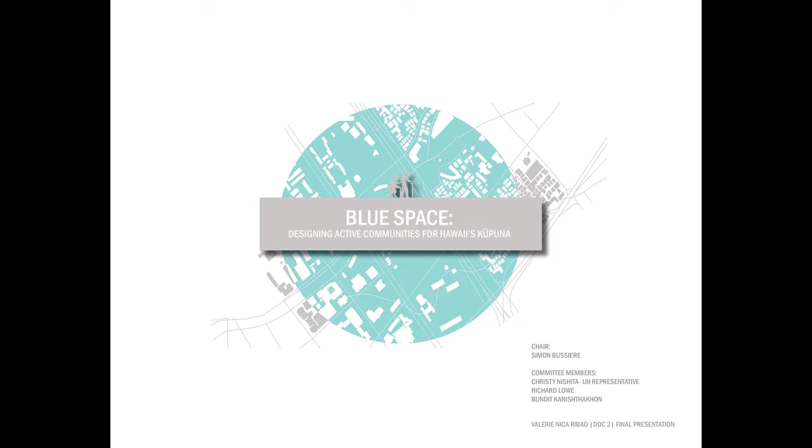I'm Valerie Ribao, and I'm presenting my doctoral thesis, titled Blue Space: Designing Active Communities for Hawaii's Kupuna. For those who may not know, Kupuna is translated in Hawaiian and refers to an older adult or grandparent. My thesis is divided into two parts: the first half discusses my research problem and what blue space is, and the second half is dedicated to my site approach, design principles, and how they are applied to my design.

My focus is taken back home here on Oahu, so I looked at the census tract of those 65 years and older. Many older adults are within the city side of the island, as marked in red on the map, compared to other parts. One factor is that many amenities are provided in the city of Honolulu, such as convenient hospitals, healthcare services, and proximity of kupuna homes.

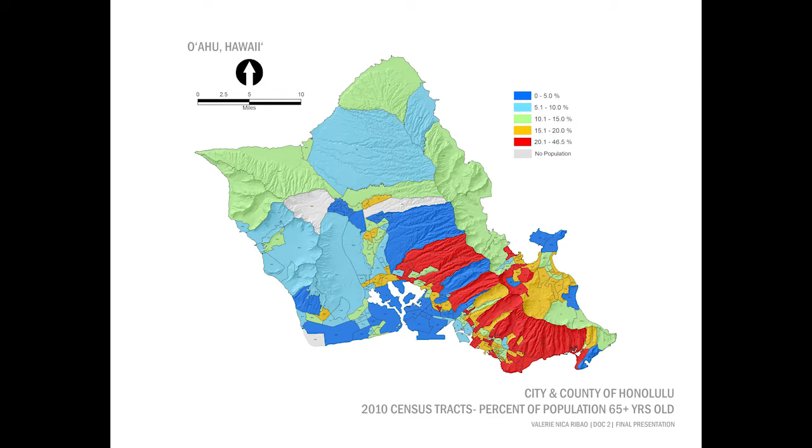As shown on the table, these percentages were projected from 2010 through 2040, and I wanted to compare the growth of Hawaii's older adults to the US as a whole, and how much higher it would still be in the next 10 to 30 years.

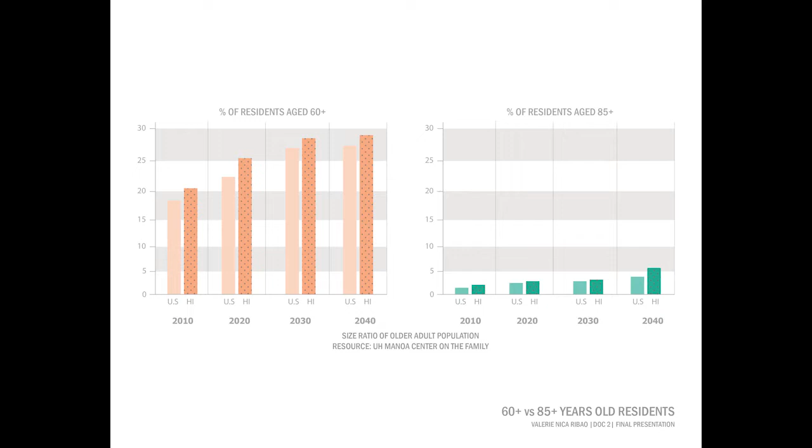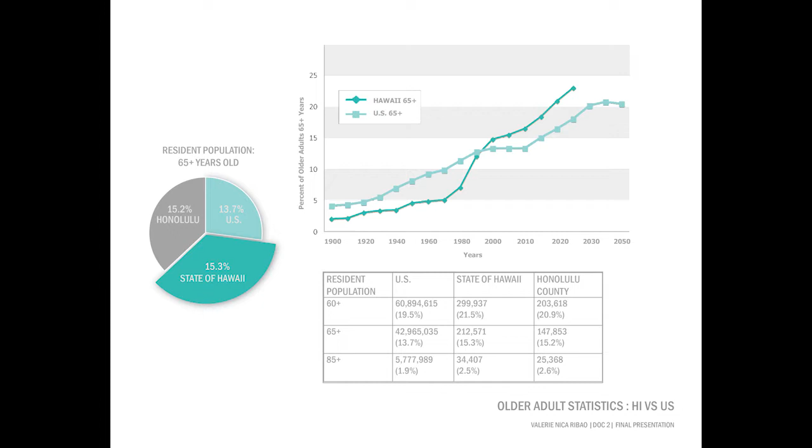Hawaii state residents aged 60 and over made up 21.5%, compared to the US. The same goes for kupuna who are 85 years and older. By looking at the graph and table, the number of older adults 65 and older is higher than the national average and will continue growing. These numbers matter to keep in mind, to consider how they will affect our built environment and how these individuals will navigate around the community.

The positive side is that through research, Hawaii has the highest life expectancy for ages 65 and older, at 17.3 years compared to the national rate of 12.9 years. Though among kupuna, they face difficulties in their everyday lives, specifically those with disabilities such as hearing, vision, or physical mobility. In fact, 87% of the older adult population have one or more chronic conditions, and about 38% reported poor physical and mental well-being.

Most kupuna stay at home, live in a more institutionalized care home, or use other healthcare services. Though spaces within the building, such as recreational spaces or outdoor areas, are limited. We have to note that each kupuna has different interests, though there are some activities they may not have the energy for.

The goal of this thesis is to break this gap between the kupuna and the community. To break that gap, an element that can help bridge these two together is the factor of water environments, or as I call it in this thesis, blue space. So what is blue space?

Blue space is a term referring to areas that harness natural bodies of water, such as watersheds, ponds, lakes, or oceans. It's used in environmental policy and management as nature-based design solutions, which are instruments inspired by nature to enhance ecosystem services and multiple health benefits. In this thesis, blue space focuses on developing infrastructure near blue space, such as waterfronts and walkways, making these areas age-friendly. Blue space is a similar concept to green space, which people refer to as grassy parks.

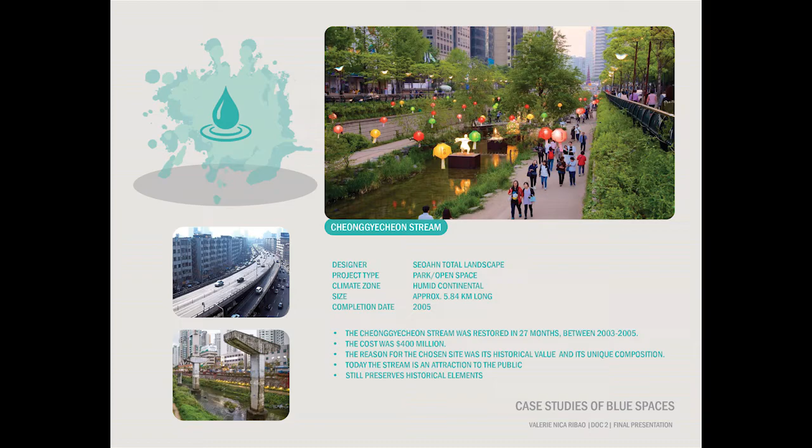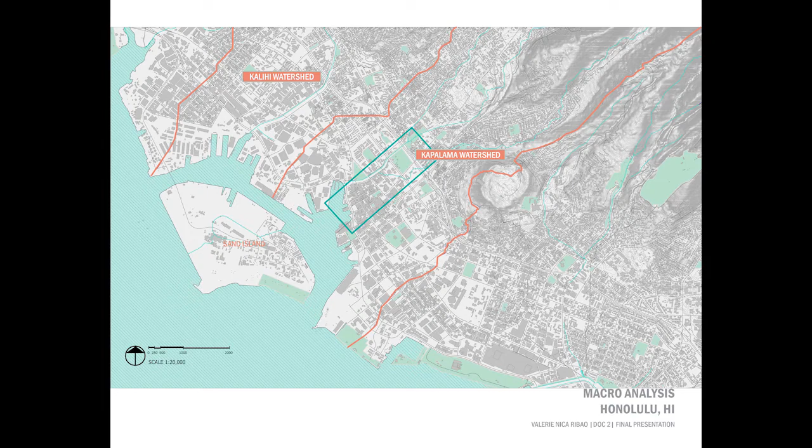Moving on to the design. Outlined in the teal box is my focus area. This map shows future conditions when sea level rise strikes the south shore of Hawaii at 6 feet, which may occur 50 years from now. I think this is important to consider when designing for the kupuna, to think about circulation.

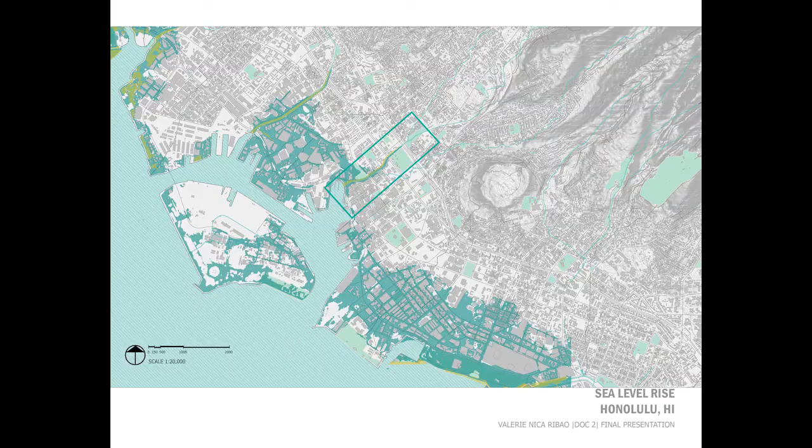One reason I chose this site is that, throughout the sites I observed, the Kapalama watershed had a significant amount of senior care services in proximity to the Nu'uanu stream.

Also, it is one of the locations with a high density of those who are 65 years and older. A zoom in of the site shows that there is a lack of ADA applied areas, such as no curb cuts, worn out tactile pavements and crosswalks, and multiple trip and fall hazards.

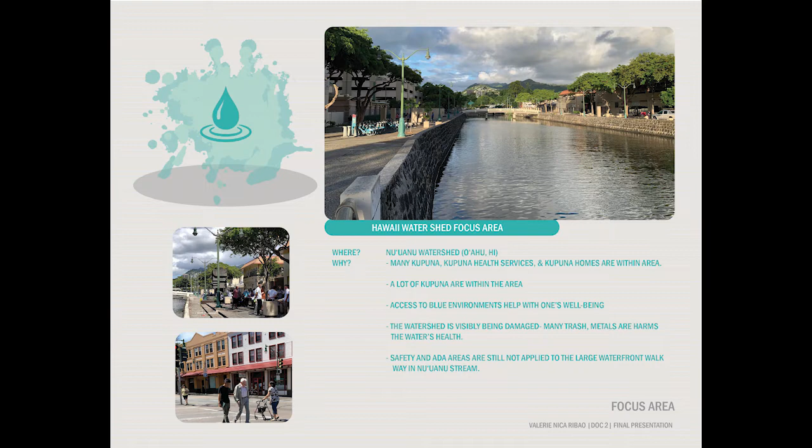As for the water, there was a lot of trash or metals randomly dumped into the stream, which damages the health of the stream. The positives of the site are the connection of the building and views of the water. Many kupuna, as I observe, love to gather near the water.

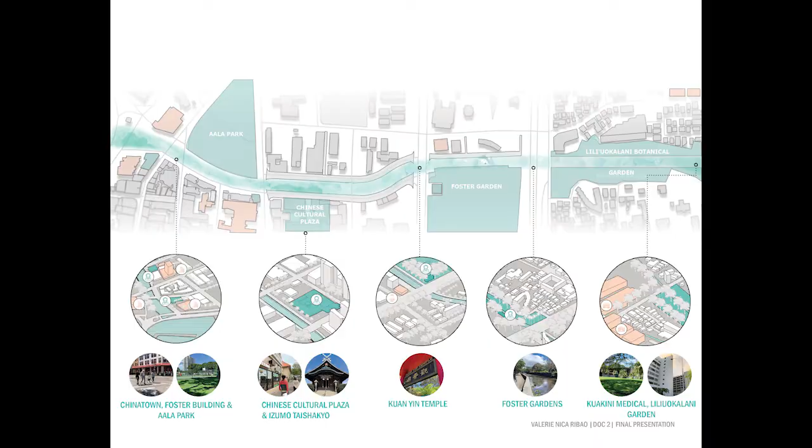Through the Nu'uanu stream, there are various landmarks which are key elements to enhance the design of these areas. This could be a good indicator for kupuna to easily orientate themselves. In this map, I've diagrammed the horizontal access, which shows moments where bridges are placed, restrictions that are not accessible to pedestrians, and in blue arrows, the nice views are represented.

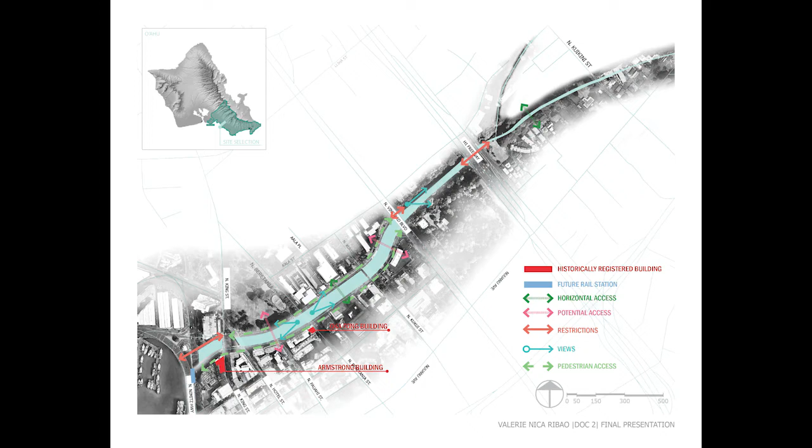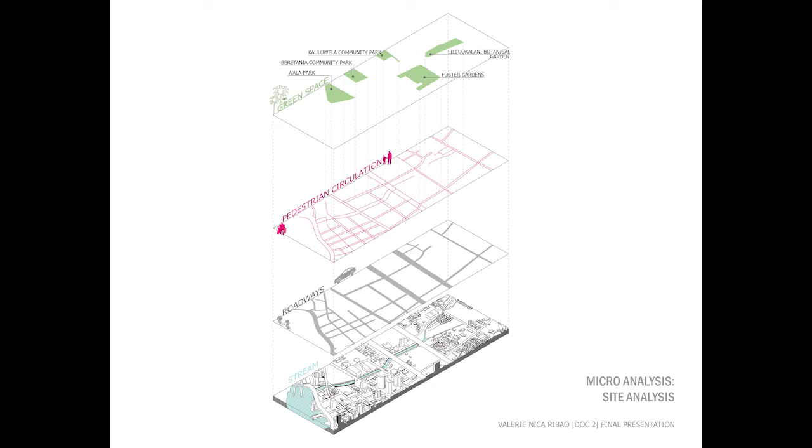This axonometric layers the available green space within the area, and it helped me visualize how the space is and how to direct people to the water.

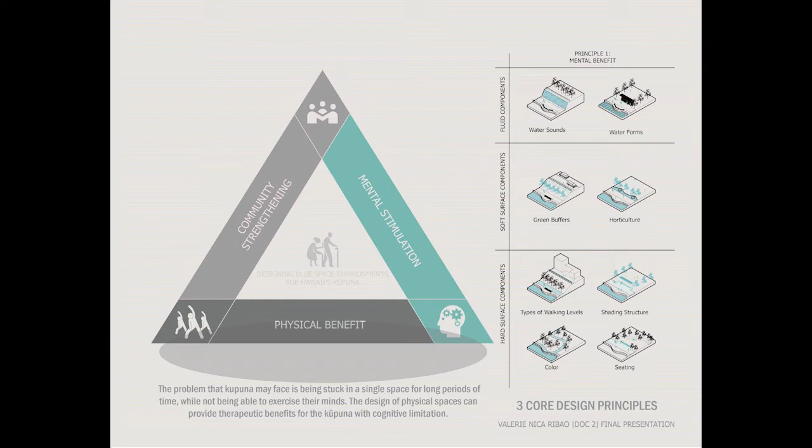Next, the design of physical spaces can encourage physical activities. These components are to help the kupuna with their mobility as they go out of their homes and enjoy leisure time in the outdoor environment.

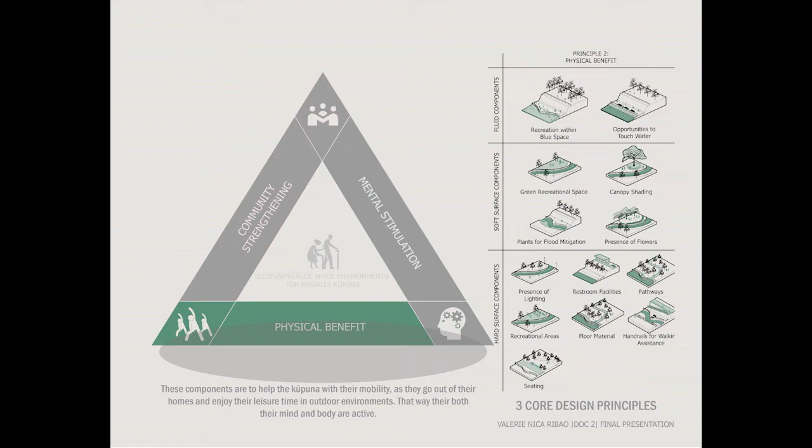The design of physical spaces can encourage community engagement, so that kupuna can comfortably enjoy their leisure time and not be deprived from cultural events going on around them. This principle combines both the benefits of the mental stimulation principle and physical benefit for the kupuna.

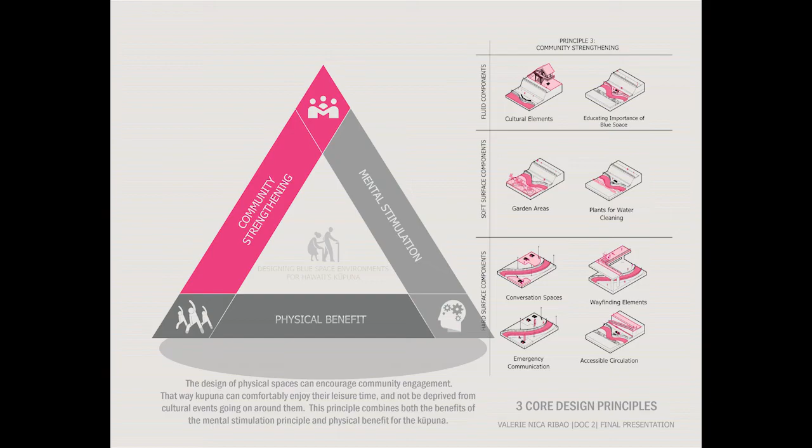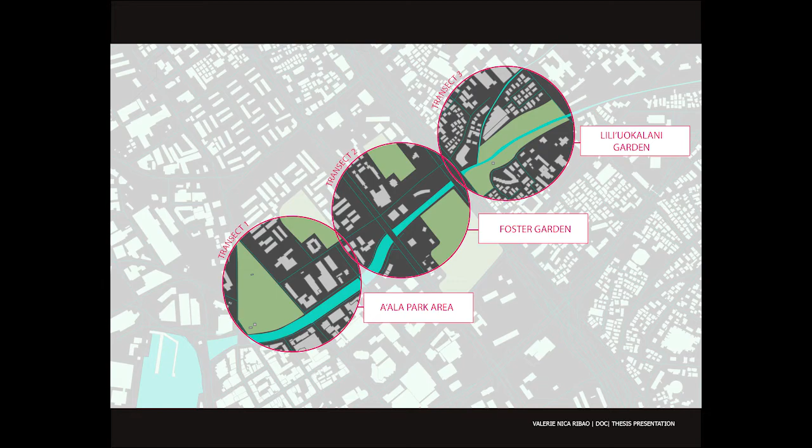I will show a couple diagrams and renderings to show different scenarios since A'ala Park, Foster Garden, and Liliuokalani have different land use areas. First is the A'ala Park area.

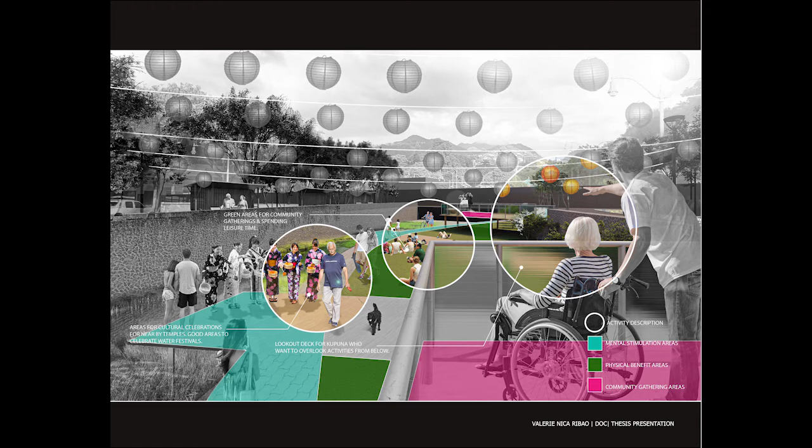This shows the different elevations of community engagement. There are higher wooden lookout areas for kupuna who want to just look over activities. The lookout areas are protruding as a way for an individual to easily distinguish their location.

For example, knowing where Mauka or Makai is. And the lower levels are examples of the physical and mental benefit principle, by having designated areas for cultural celebration and a soft surface area for picnic areas that look out at the water. The next is the Foster Garden area.

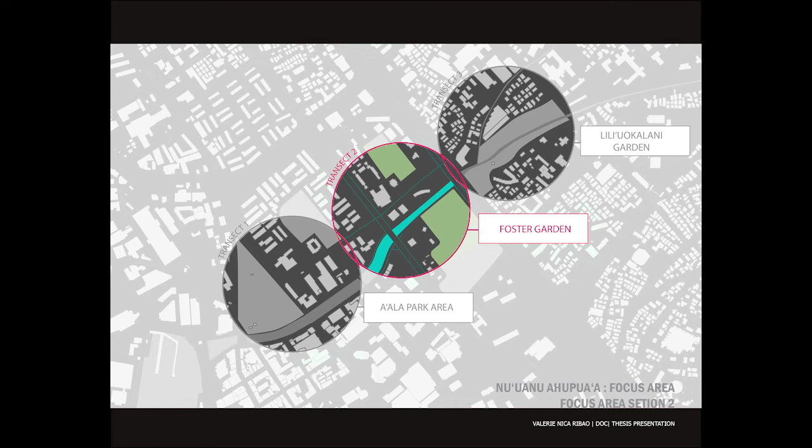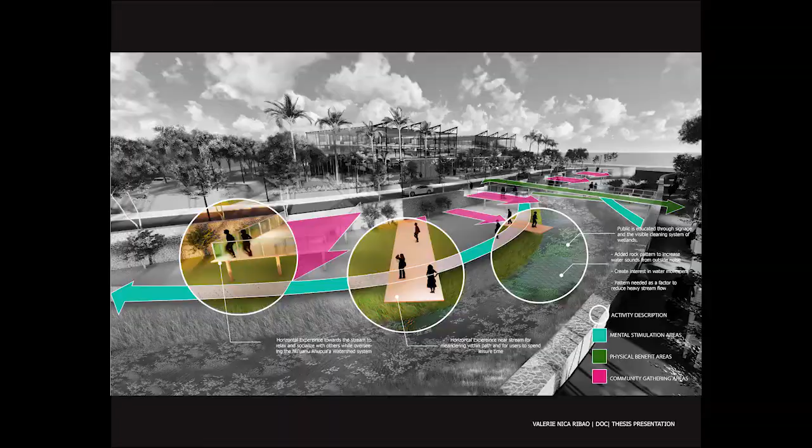I propose a conceptual idea to redesign the stream. As you can see, the stream is in a curved shape compared to its straight flow from before. The reason is that adjusting the shape helps reduce the velocity, the speed of the stream, when heavy rainflow occurs.

Having a curved stream benefits the landforms too, since it gives the opportunity for a curved, meandering path that kupuna enjoy strolling through. The lower protruding areas are spaces for people to observe the important function of wetlands, which help mitigate floodwaters. Here are also elements such as an added rock pattern to increase the water sounds and block out noise.

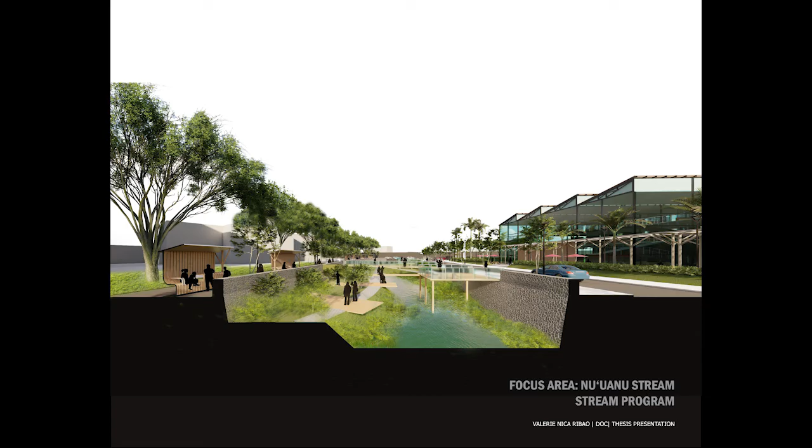This is a section cut of the area. The higher deck has various purposes as mentioned, and another function is that it's a future community pocket, for example if water level rises in the next 30 to 50 years.

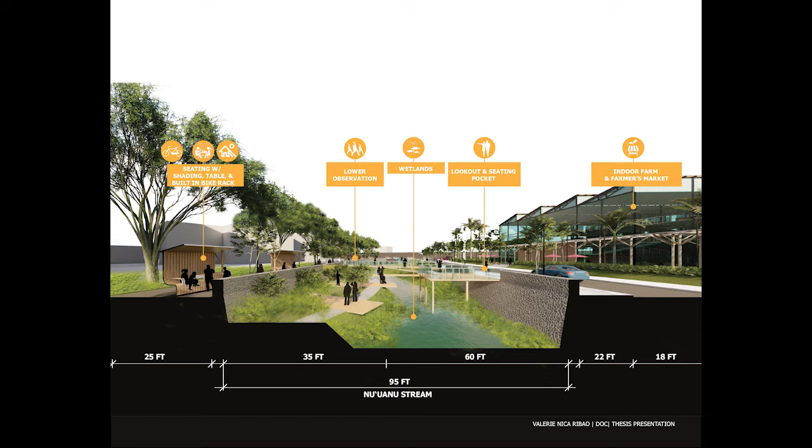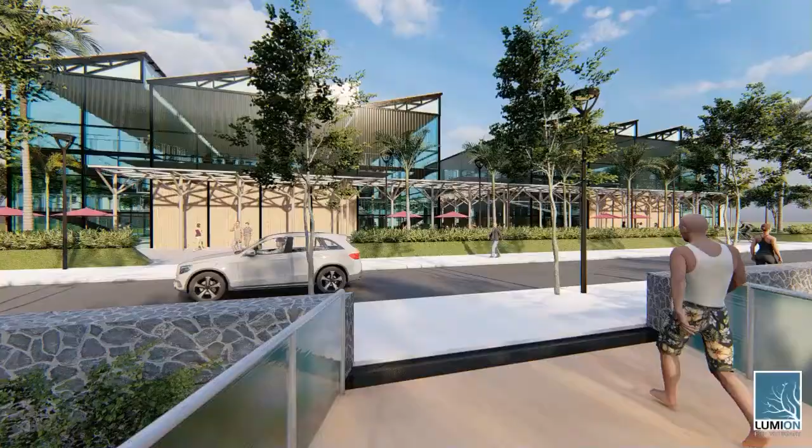I was thinking about the function of the building and how the building would respond to water. When rainfall occurs, I wanted to diagram a system of rainwater collection, collected by roof into a tank, and into a water treatment tank before it is directed to water the plants.

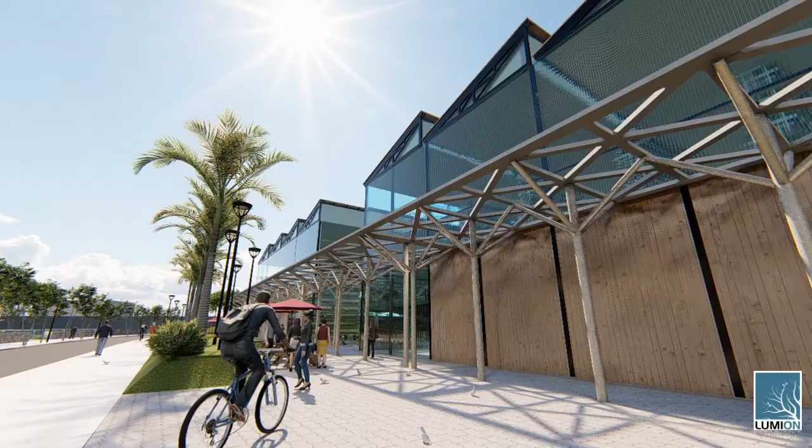In the building, it is programmed for the kupuna to spend their leisure time to grow their own fruits and vegetables, or meet up with a friend.

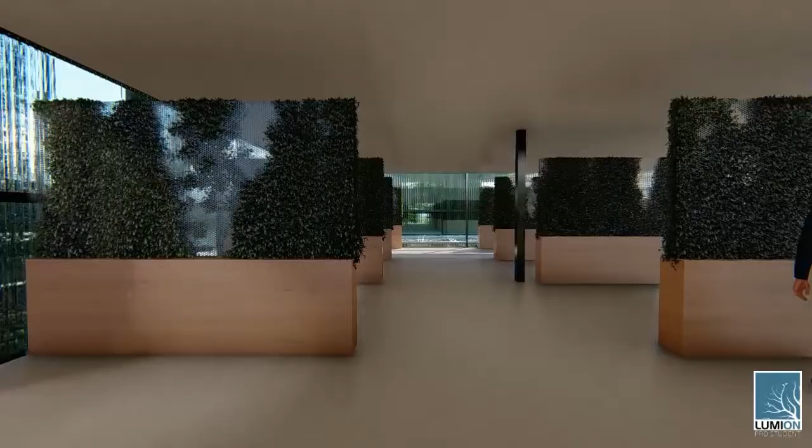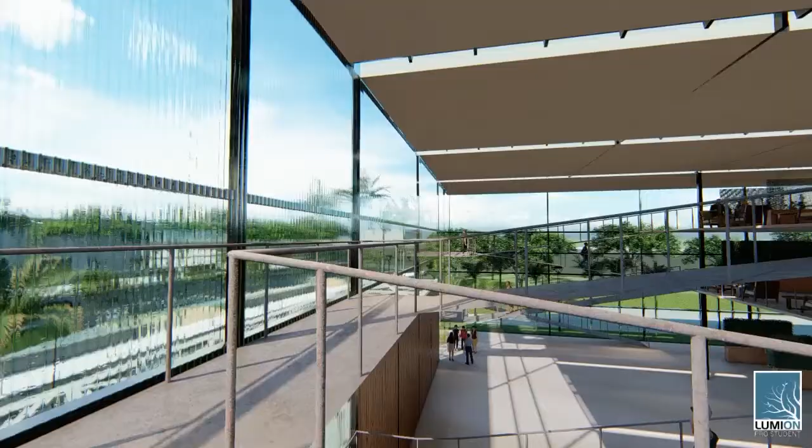This area is located right next to the Foster Garden area. This showcases a conceptual idea for Foster Botanical Garden, in which the garden itself showcases native land plants. Proposed is an idea to extend the garden to educate individuals that live nearby, or open another opportunity for those who are nearby, such as Bright Star Care or Salvation Army Adult Day Health Care, to learn about native plants.

That live on water. The public can learn more about the proposed wetland system, the importance of the watershed's health, and so on. Lastly is the Liliuokalani Garden.